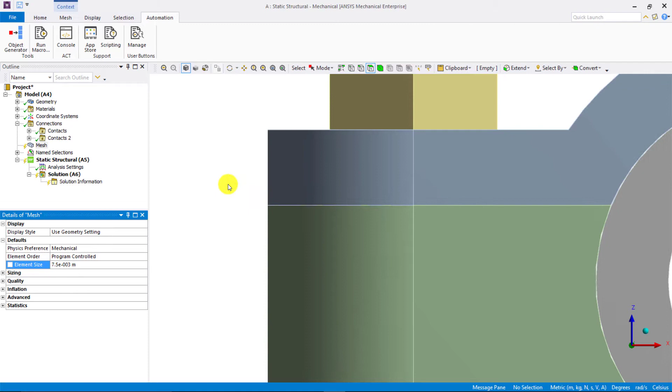Next, since the bolts are smaller in size, we wish to have a finer mesh on them so their features are captured adequately. Right-click on Mesh and insert sizing. For the scoping method, use named selection and select bolts from the list. For the bolts, let's use a smaller element size of 5e-3 meters, or 5 millimeters.

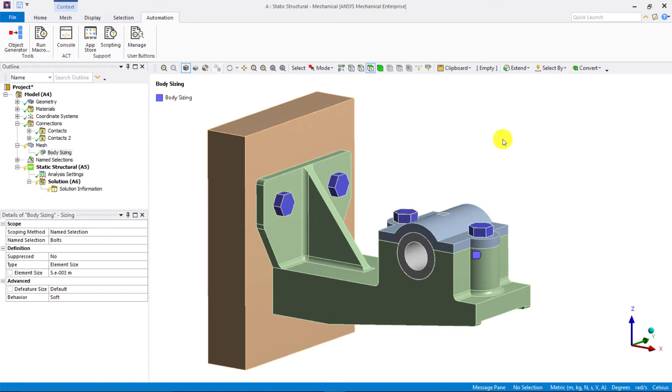Next, let's hide the bolts. Now we also want a finer mesh for the imprints of the bolt heads, to ensure proper contact engagement between the bolt heads and the mating components.

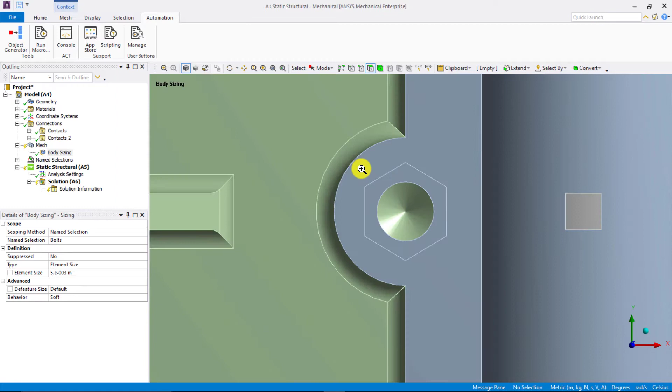Let's align the view to the XY plane. We can go to the Display tab and choose the display to be wireframe.

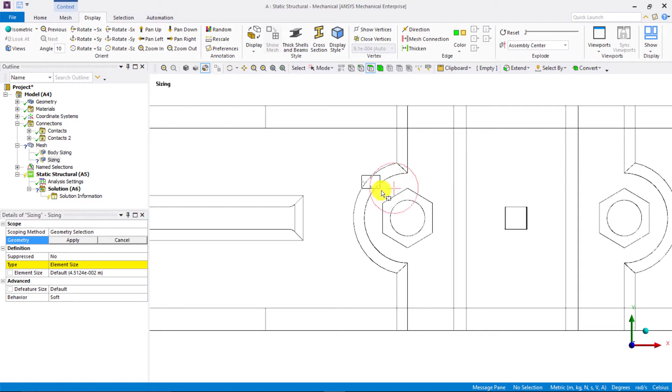Since we need to get a finer mesh on some of these faces, right-click on Mesh and insert sizing. Choose Face Selection and change the select mode to Box Select. Select the faces where we wish to get a finer mesh, being sure to press the Control button while selecting multiple faces.

Let's align the view to the YZ plane and select the other bolt head imprints. We can rotate the view to make sure all the required faces are selected.

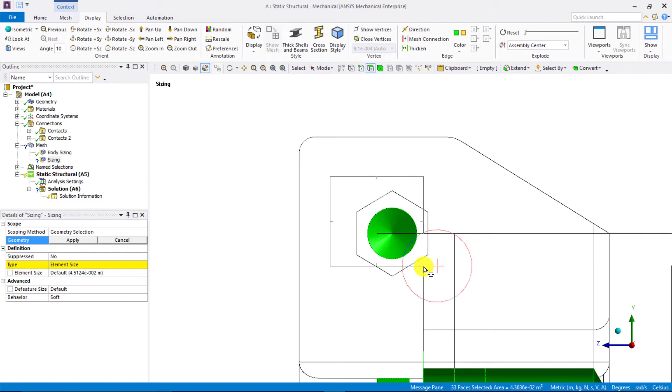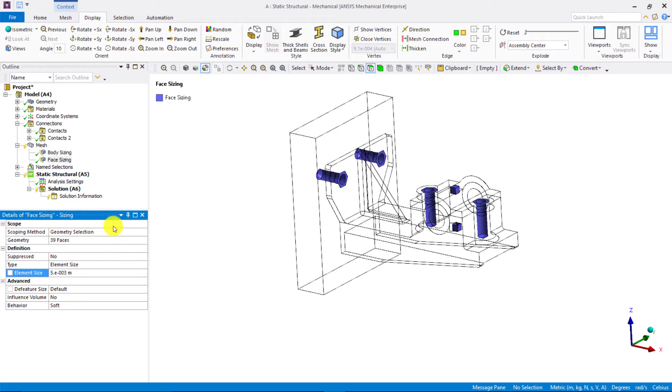Then we can click on Apply in the scoping method. Let's use an element size of 5e-3 meters, or 5 millimeters, for these surfaces as well. Let's go to the display and switch back to shaded exterior and edges.

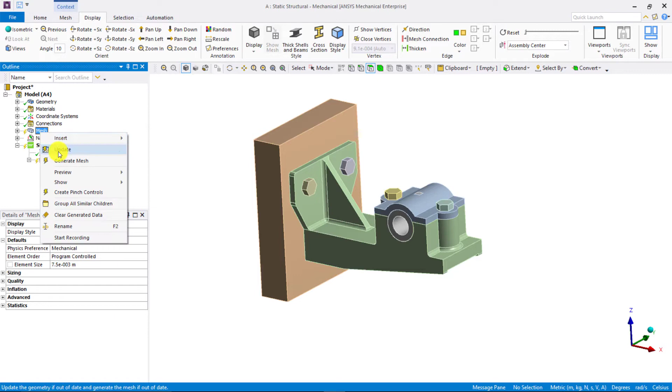Also, let's right-click and show all bodies. Now that we have specified the element size on various parts and features, we can right-click on Mesh and choose Generate Mesh. By default, we use tetrahedral elements for the mesh, and we can see that the mesh on the bolts is fine enough to capture its geometrical features.

Now the next step is to set up the case, that is, applying the bolt pretension, the operational forces, and then solving the system.

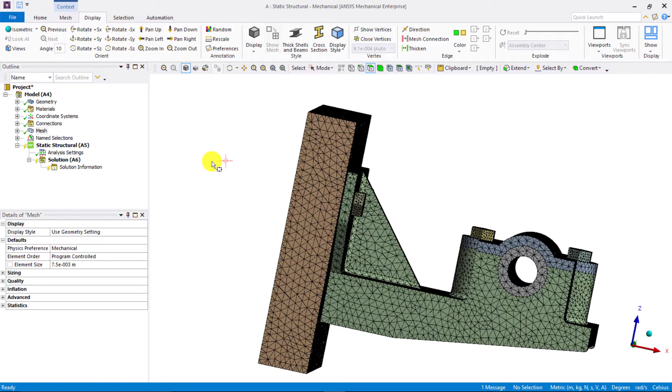First, let's go to Analysis Settings. Since we have bolted joints where bolt pretension is applied, we need two steps. The bolt pretension is applied in step 1, and then in step 2, the bolts are locked and operational loads are applied. So define the number of steps to be 2.

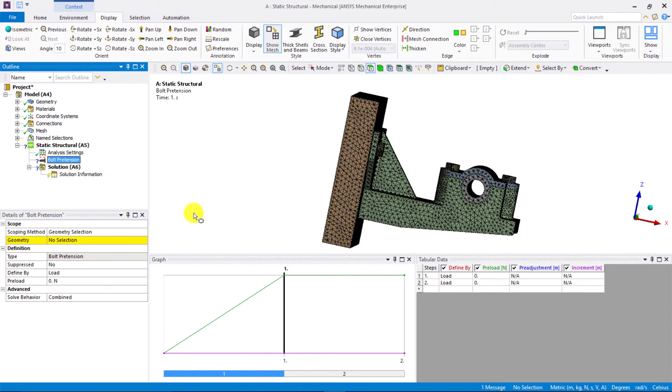First, let's apply the preload on bolts. Right-click on Static Structural System and insert bolt pretension. Hide all parts other than the 4 bolts.

So now we will apply bolt pretension. To avoid the slicing plane from passing through the bonded contact region, we will scope it to the bolt shank face. Select one shank face and click Apply in the scope.

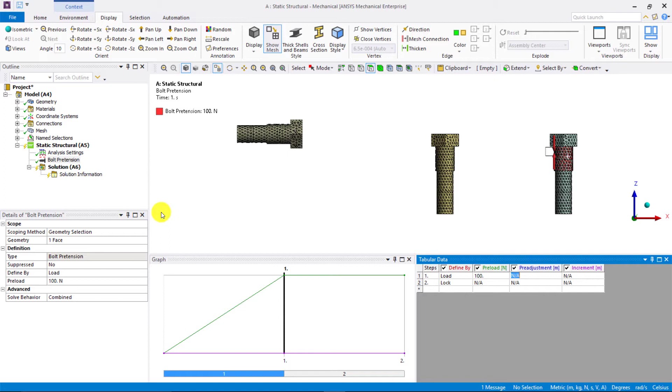Don't forget to lock the bolt pretension in the second step when operational loads are being applied. Let's apply a bolt preload of 100 Newtons in step 1. Next, we use the Object Generator tool from the Automation tab to create bolt pretension objects for the other bolts as well, and group all of them together.

Now we want to apply fixed support. Right-click on the Static Structural System and choose Insert Fixed Support. Select the back surface of the wall and click Apply.

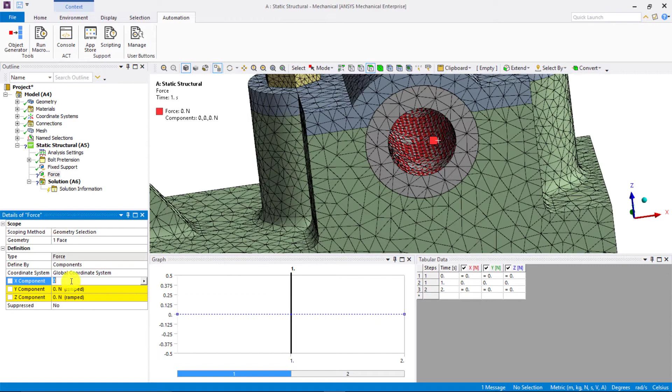Next, let's apply a force on the inner surface of the bearing. Let's define the force by components and apply a force of 200 Newtons in the positive x direction. Now, this is a problem involving bolted joints and bolt pretension.

So make sure that the force applied in the first step is 0, and it is 200 Newtons in the second step, since the first step is reserved for applying bolt pretension. Applying operational loads on the assembly simultaneously in the first step will lead to wrong solutions.

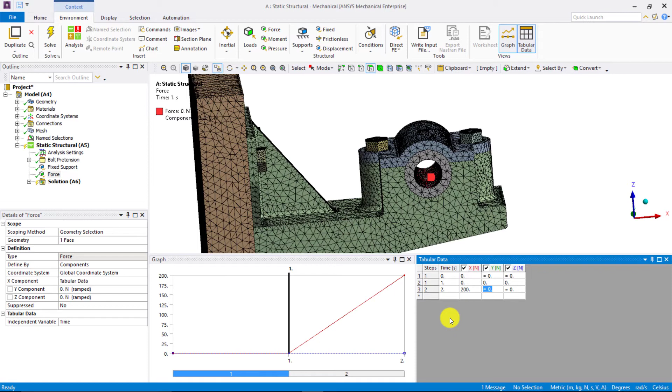Apart from this, since we have used frictional contacts between certain pairs of surfaces, we have non-linear contacts to resolve in the first step. To help improve convergence in the first step, we will define a certain number of sub-steps in the first step.

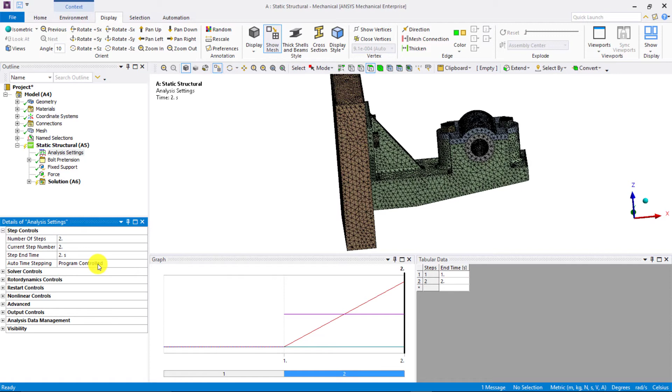Since we are going to define the number of sub-steps we want the solver to use, let's set auto time stepping to off, and define the number of sub-steps to be 5. For step 2, let's keep auto time stepping set to program controlled. This completes the setup for the model and we are ready to solve it.

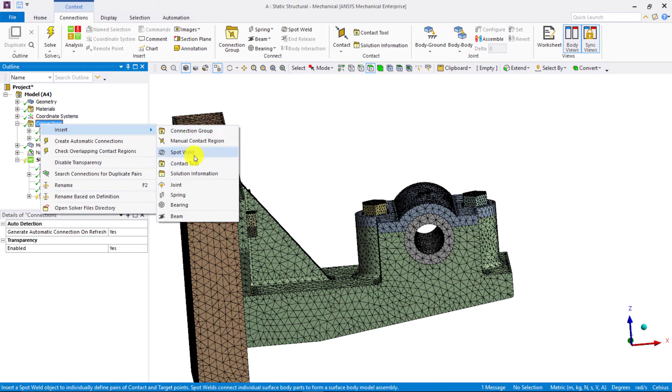But before solving the case, let us do one final check to make sure that all the contacts have been defined correctly. Right-click on Connections and choose Insert Contact Tool. Right-click on the initial information and select Generate Initial Contact Results. Now let us check the initial contact information.

In the worksheet, we observe 4 bonded contacts highlighted in red and 4 frictional contacts highlighted in yellow. According to the legend, contacts highlighted in yellow and red are open or near open. The contacts highlighted in red are supposed to be closed, but their status is far open, and there are no contacting elements for these contacts. So these 4 contacts are a cause of concern and need to be fixed before we can proceed with solving the model.

To resolve this, we will go to one of the 4 contacts, select it, right-click and go to Selected Item in Tree. The 4 contacts between the bolt threads and the respective slots are the ones that were highlighted in the initial information worksheet.

To resolve this issue and close the gap between contacting surfaces, we will increase the pinball radius. The pinball radius should be larger than the gap between the two faces for detecting contacts between them. To decide the appropriate pinball radius, first let's measure the clearance between the contacting surfaces.

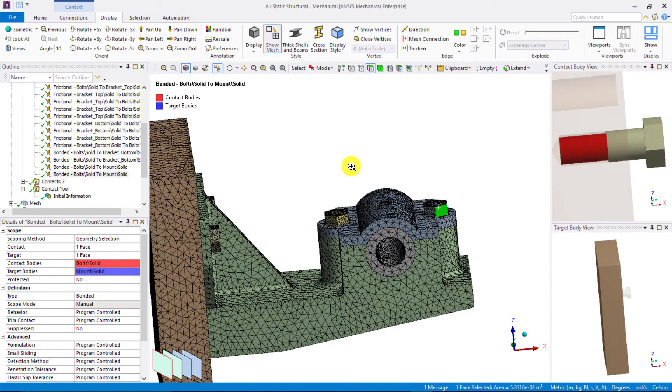To do this, select the body of the bolt, right-click and select Hide All Other Bodies. Then using the Select Edge tool, we see that the radius of the threaded portion of the bolt is 1.4e-2 meters, or 14 millimeters, and the slot radius, which equals the radius of the bolt shank, is 1.6e-2 meters, or 16 millimeters. So there is a gap of 2 millimeters between the threaded portion of the bolt and the slot.

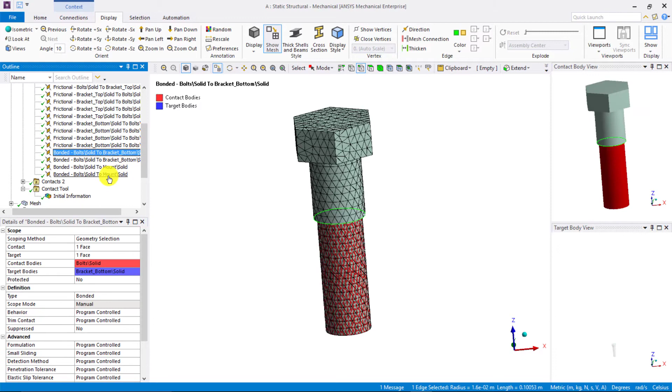Due to mesh discretization, the surfaces are not exactly cylindrical but are in fact faceted. Because of this, the pinball radius needs to be higher than 2 millimeters to allow some tolerance for these faceted surfaces. So select the 4 contacts, and under Advanced, go to the Pinball Region, select Radius, and define a pinball radius of 4e-3 meters, or 4 millimeters.

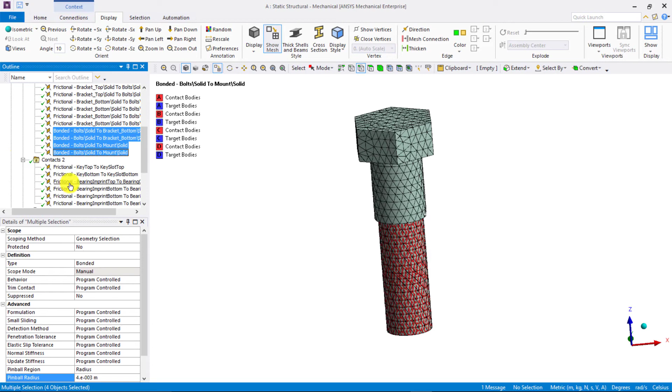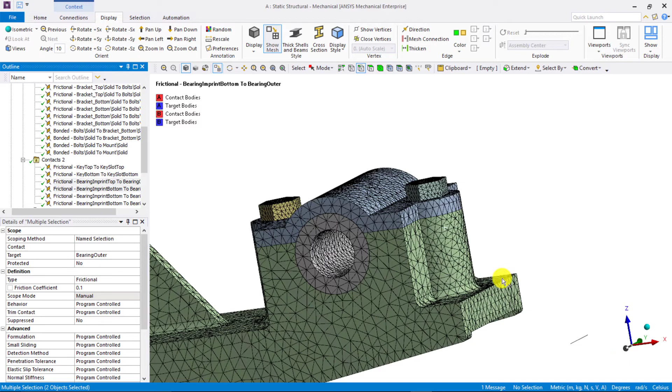Next, let's move on to the frictional contacts that were highlighted in yellow in the initial information worksheet. Since the contact area between the bearings and the brackets is quite large, in order to get accurate results we need to ensure proper initial contact between these two contact pairs. If we zoom in, we can see this gap clearly.

In order to close this initial gap, we go to the geometric modification, and for the interface treatment we select Adjust to Touch. This closes the small gap between the bearing and the brackets and ensures sufficient contact is established between the bearing and the two brackets.

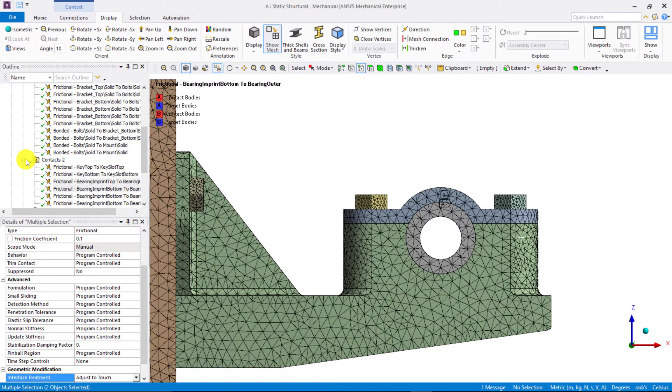Then let's generate the initial contact information again. Now we see that the 4 bonded contacts are closed, as indicated by the orange highlighting, and there are sufficient elements in contact with each other. Also, the status for contact pairs between the bearing and the two brackets is now closed.

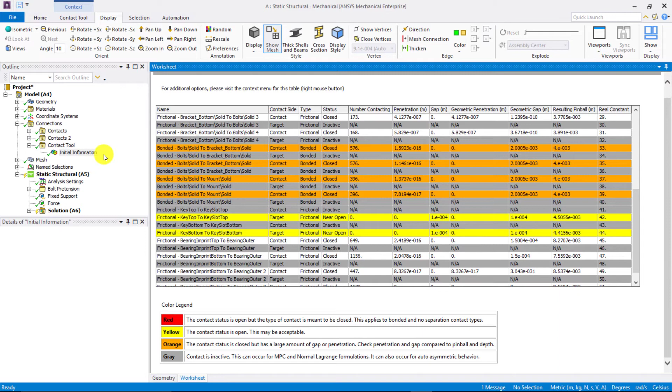So in this way, we can change the pinball radius and use the Adjust to Touch option to resolve contact pairs that weren't closed initially. With this issue resolved, we can move on to solving the system.

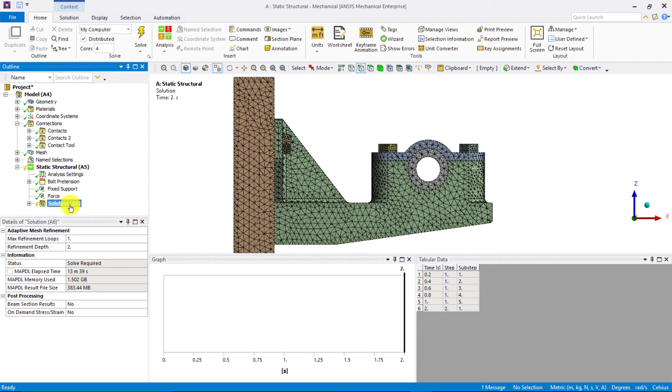Under the Home or Solution tab, specify the number of cores in the machine that you want to use to solve the system. Here we will use 4 cores. Then right-click on Solution and choose Solve. Once the system has been solved, we can check the results.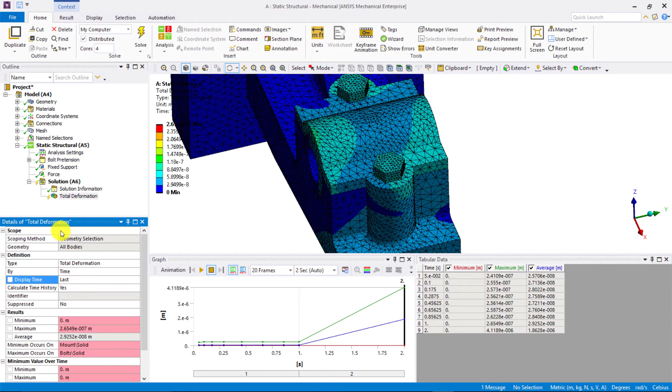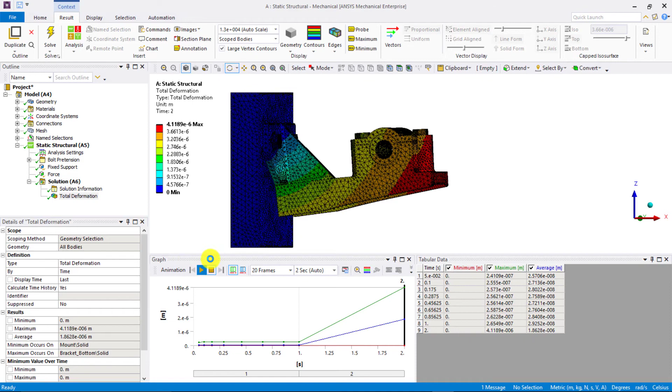Let's first look at the total deformation. We can animate the results to see the deformation of the assembly at different times. Since the deformation values are very small, we can increase the scaling factor by which the deformation is enhanced so as to better visualize it. We see that the force applied on the bearing in the positive x direction lifts up the bracket from the wall.

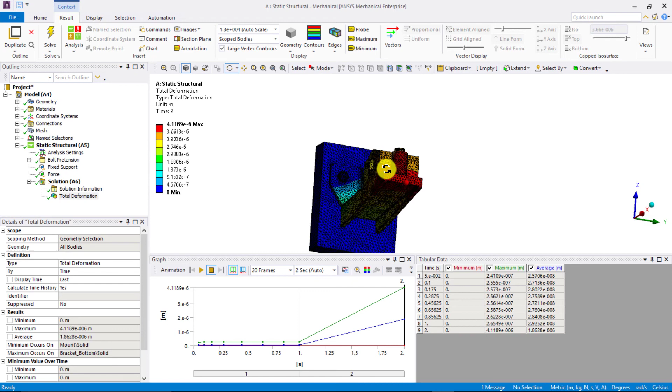Another important result we want to check is the contact status. So right-click on Solution and Insert Contact Tool, then right-click and select Evaluate All Results. When we click on Status, we can check the contact status for all the contact pairs.

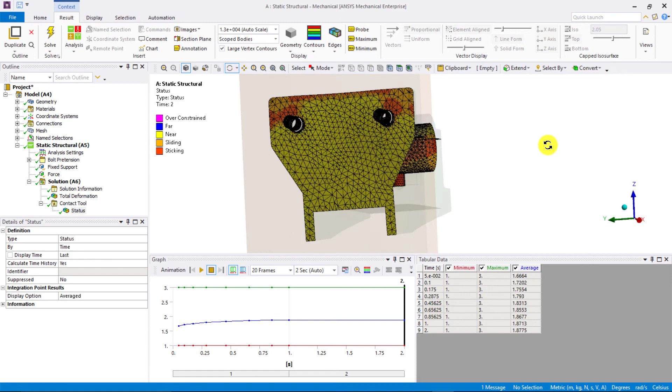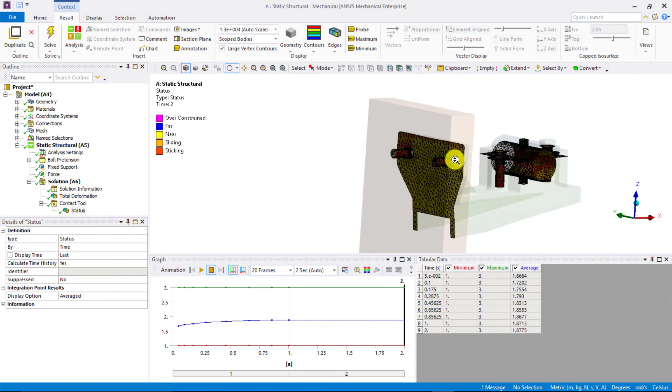At the end of the second time step, that is at time 2 seconds, since the bracket lifts up from the wall, we see that the status is sticking or sliding at the top edge of the bracket and the wall, but everywhere else the status is near, as indicated by the yellow color. We also see that the status of the threaded portion of the bolts is sticking, which is expected since we have a bonded contact in these regions.

In the case of the bearing, the force in the positive x direction leads to a sticking status between the bearing and the brackets in the positive x direction.

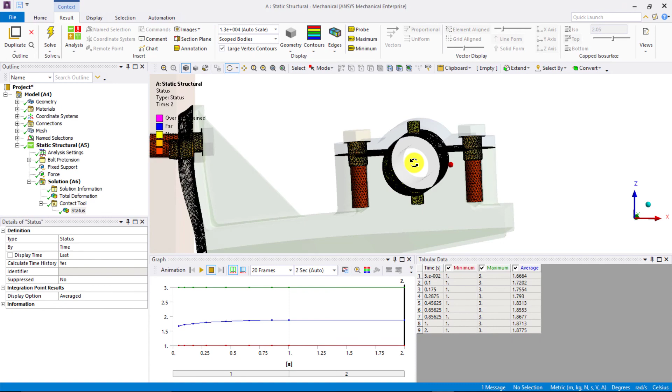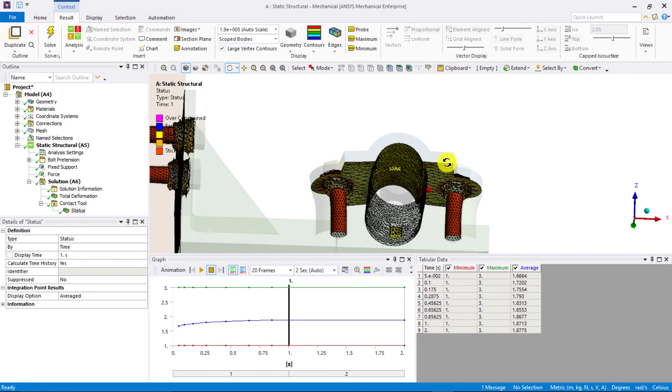Now let's check what the contact status is at the end of the first step, in which bolt preload has been applied. So change the display time to 1 second. We can also change the scaling factor to 1, or true scale. We see that regions close to the bolt heads have a sticking or sliding status, which confirms that the bolt preload has been applied correctly and sufficient contact has been established between the bolt and the mating components.

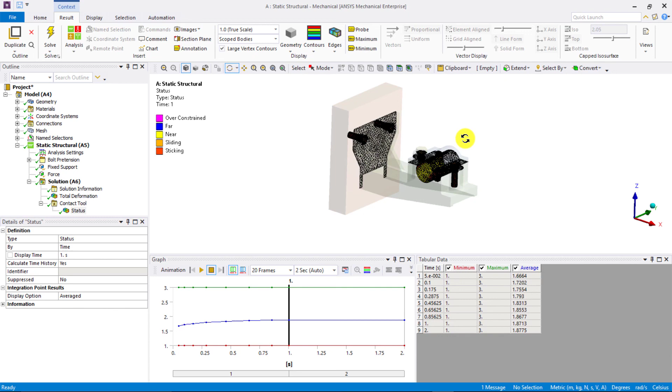Now you can follow the steps in this video and try to solve the system for yourself using the geometry and the archive project files provided with this workshop.